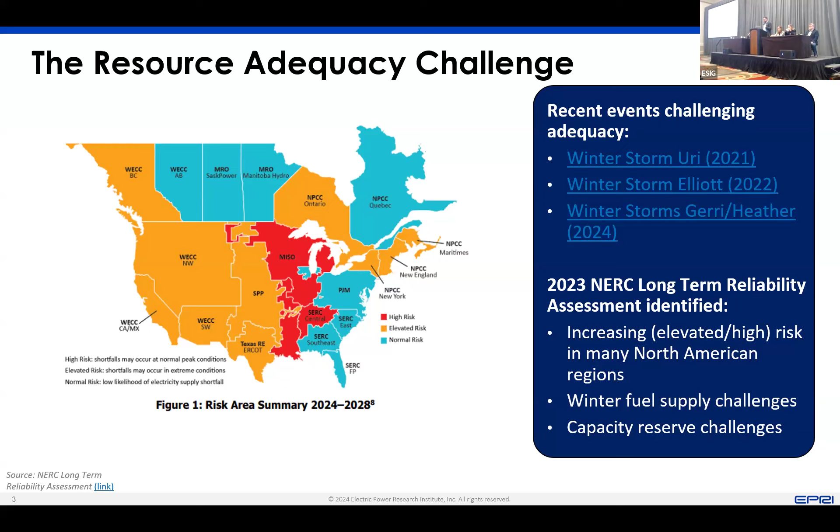Being able to understand whether we have an adequate system is going to be important for the future. So we set up this initiative back in 2021 at EPRI to look at where we need to rethink or revisit a lot of the adequacy issues.

Over the past few years, as most folks would know, there's been a lot of updates already to a lot of the processes being used at RTOs, at utilities, by regulators and others.

So a lot of these things are happening in process or in parallel with a lot of the activities we did here. This was a project we started, as I said, in 2021, finished late last year, early this year. We had about 25 different members.

Do want to acknowledge the funders there, many in this room, a mix of utilities, RTOs, NERC are there. We also had a pretty decent external advisory group.

Again, quite a few of you here were part of that, so appreciate that. And a lot of partners down on the bottom left as well.

Split it into three areas, and I'm going to focus on one or two of these today, just pick out a few particular key findings. One around the processes: how do we actually think about what resource adequacy is, what should you be measuring, what scenarios you need to measure, and what are your criteria and metrics you're measuring against.

The actual models and data that you're using to assess adequacy—how you actually model the different types of supply and demand side resources, how you look at what data to use: load, wind, solar data, the generator characteristics data, all of that piece.

And then the actual tools—there's a large amount of commercial tools out there, also open source research type tools—being able to understand what those tool capabilities are, where the gaps are, and start looking at addressing some of those.

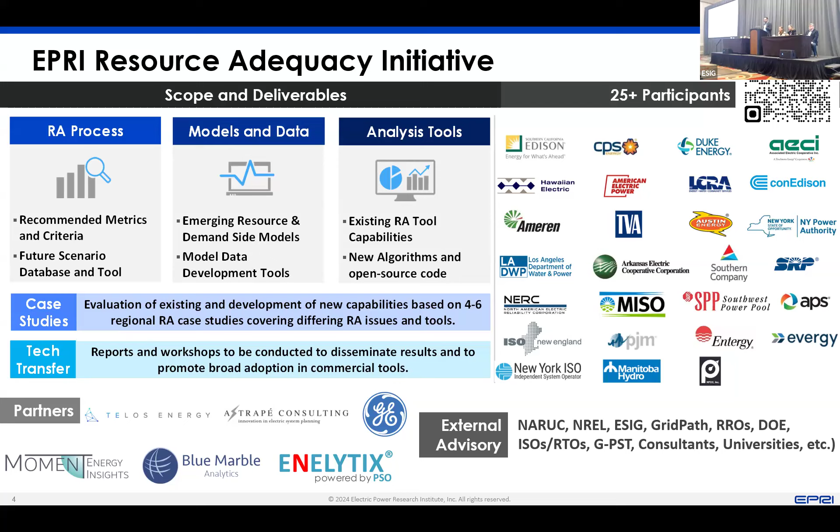We use these case studies to illustrate some of these issues. There are 6 different case studies representative of the types of regions. Typically we looked at something in the near future and then something in the next decade when there's more renewables, more electrification, those types of things. We had those to level set and understand things like which metrics make the most sense to use, which criteria you should assess, things like weather dependent outages. We did that in some of those studies, or energy storage, and quite a few of the studies that I'll talk about in a second.

The intent wasn't to actually look at this specific region and try to understand the adequacy risk in that region. There are already lots of folks who do that themselves for their own assessments. But really trying to use those case studies to understand the changes that are needed in the assessment process.

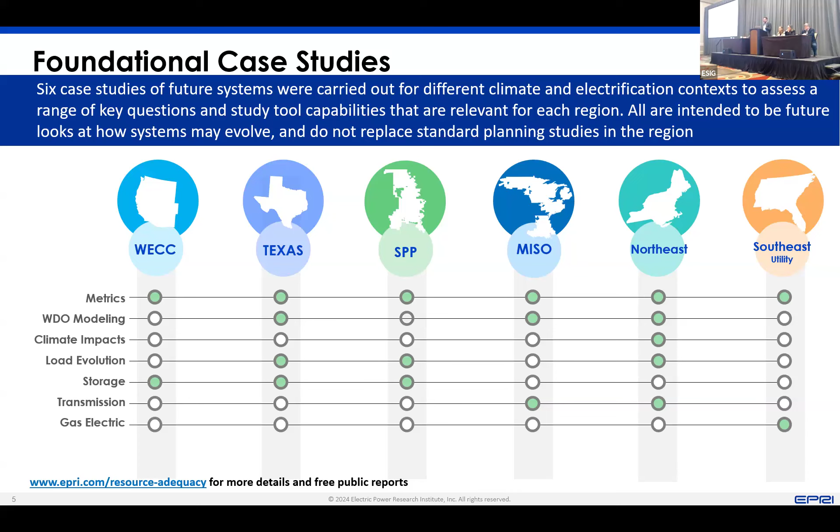Coming out of this, there's basically 7 main deliverables that we pulled together that are available. The first 3 are more at a high level, more strategic, looking at how you set up your resource adequacy philosophy, what is resource adequacy, what are the principles you need to use when designing the process, and what you might need to think about as the resource mix changes as we go to clean energy or net zero or a zero carbon kind of system.

What should we be doing when we think about resource adequacy assessment? Then the scenarios, how you actually develop scenarios and select those. Part of a side project on this, we worked with ISO New England on a screening tool to identify which periods, across large amounts of historical weather data projected for future climate, are the conditions you should be studying for resource adequacy and energy adequacy type assessments. And then the last one's on metrics and criteria.

I'll talk about that in a second at a high level, but that was the one that, when we worked with the various members of the project, really got the most attention for most of the project. We need to probably revisit the standard 1 day in 10 LOLE. I know ERCOT will talk in a while about some of their work, trying to understand what updates are needed there, both in terms of the metrics used as well as the criteria. So metrics being the actual number, LOLE, but criteria being what level of LOLE or EUE or whatever it is that you need to meet so that you've got a reliable system.

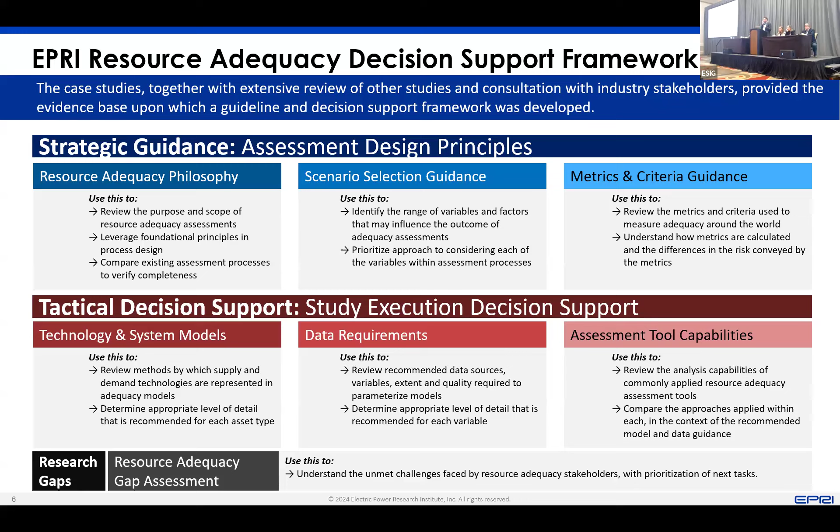So for each of these documents, there are tables that show what the key issues are, so practitioners can go and understand where they sit, what changes they may need to make in terms of the data they're using, or the models or tools they're leveraging. And then we did a gap assessment as well around future challenges, really understanding the known unknowns, and then the unknown unknowns too, the things we don't have as good a handle on.

Just to talk a bit about some of these, I'll go quick, very high level, on the metrics, because I know there's going to be more discussion on some of the metrics issues later. We came out with 4 metrics recommendations and 4 criteria considerations. I think maybe a little less strong on the criteria just because it is quite specific to the system.

In terms of metrics, we don't have one metric, and I think that's pretty well understood at this point. There's a good ESIG report that Telos led a few years ago that goes through a lot of this, looking at not just the average values when you assess across a Monte Carlo simulation of hundreds or thousands of draws, but actually looking at what's happening at the outliers, the tail events or top percentile events, to better understand when things go wrong, how badly can they go wrong.

Better leveraging existing metrics means looking at things seasonally. There's been a lot of focus now in places like MISO and SPP on seasonal assessment, being able to understand when and how those metrics are showing adequacy shortfalls, so you can better understand what you might do to mitigate it, and actually describe the characteristics so you can understand what kind of customer impacts you might have and what that means from a system perspective.

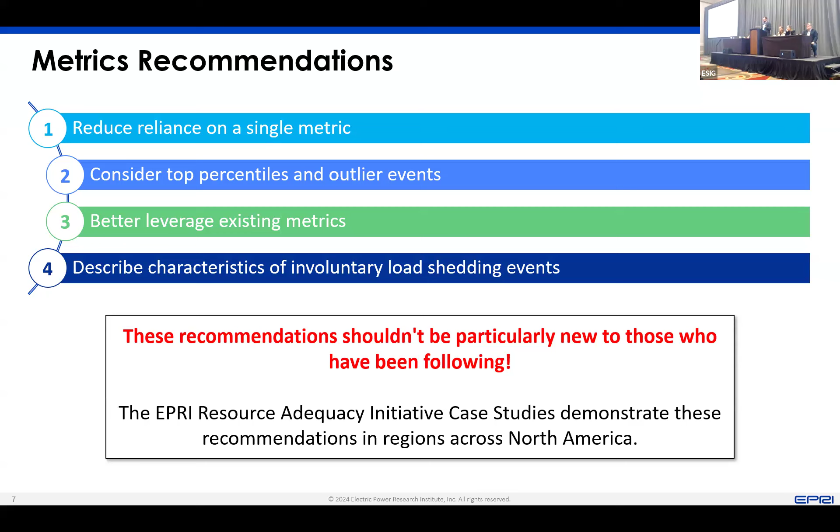From a criteria standpoint, there are a bit more considerations. I don't know that they're hard recommendations, but it probably isn't a binary choice anymore - it's probably not okay, we've met the requirement and we're fine, and if we didn't meet it, we're in trouble. There's probably something a little bit more nuanced than that you need to think about. Multiple metrics is one of the things there.

The criteria setting should consider economics to some degree, whether that's directly in the actual assessment or at least thinking through what's going to happen if there are shortfalls and what are the ways you're going to actually meet that if you do need to build more resources.

Customer expectations, as we think about the nature of risk - if we're moving to winter risk type events, the appetite or the ability to actually absorb load shedding might be a lot different. The damage due to load shedding can be very different there as well. So thinking through that and understanding the criteria in that context.

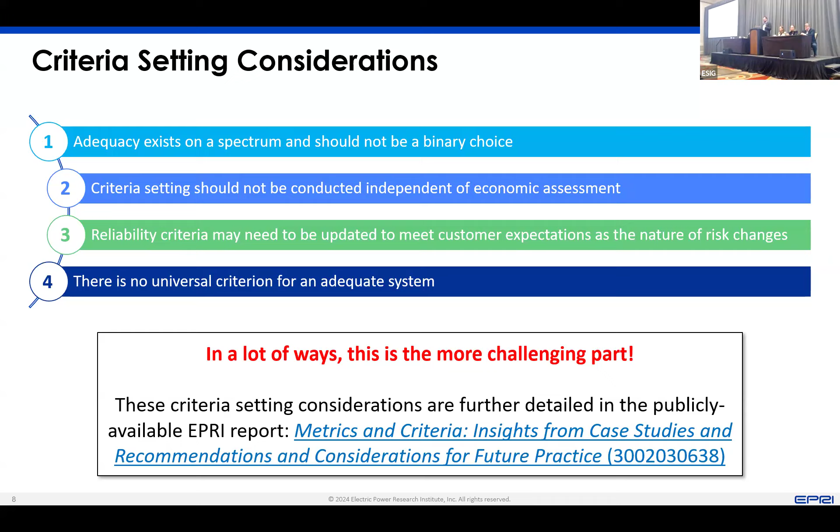We also think there's probably no universal criteria. I know in North America, we've always had kind of the 1-in-10. It may not be the case that we go to an EUE metric and we all have a normalized EUE of 1. It could be we need to think through other ways to do that.

So that was the metrics piece, and I know there's more discussion later. I just wanted to touch on one or two other things that we saw.

Storage is one of the things that really comes up a lot in this - one of the key factors we saw has a big impact on the results. Whenever we do any of these assessments, how you model storage is always a key piece. There are lots of different assumptions you can make with energy storage modeling in adequacy assessment - not to say there's one perfect way to do it, because there are different considerations depending on what the study is trying to do.

Things like how you actually dispatch storage - is there an economic dispatch? Is it based on reliability or some heuristics? Is it just using it to peak shave, almost as a time series you could put into a model? And then how you actually optimize it - what's your optimization window, do you have look-ahead, do you have the ability to store energy now for using later, and how you're thinking about state of charge management there.

How you model efficiencies is quite important and can have a big impact on results. The state of charge itself - do you continuously monitor it or only monitor it during risk periods? And then things like actually modeling outages of energy storage as well.

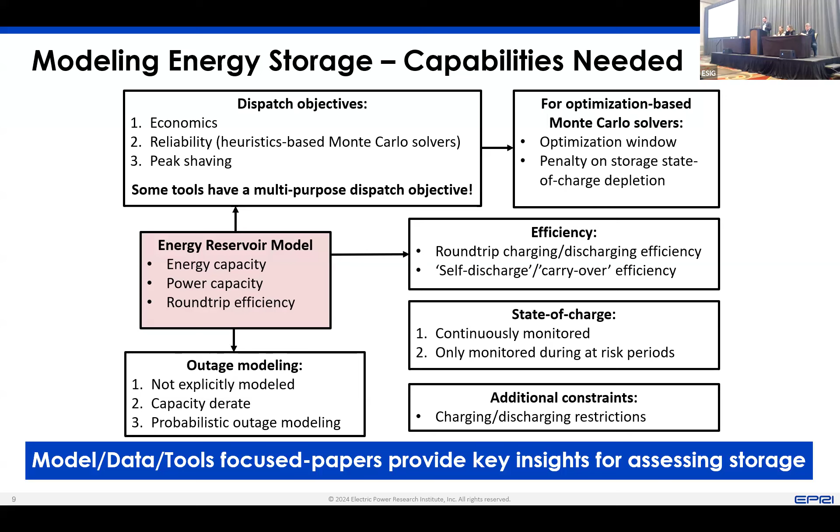A few interesting results we saw from some of the studies - this was the study in Texas that the Telos folks led, where we looked at different ways to model energy storage in Plexos, with different approaches as you can see. One thing you can notice is the expected unserved energy, as you'd expect, is the same no matter how you optimize energy storage - you're just moving your energy around, so it's going to still have the same unserved energy.

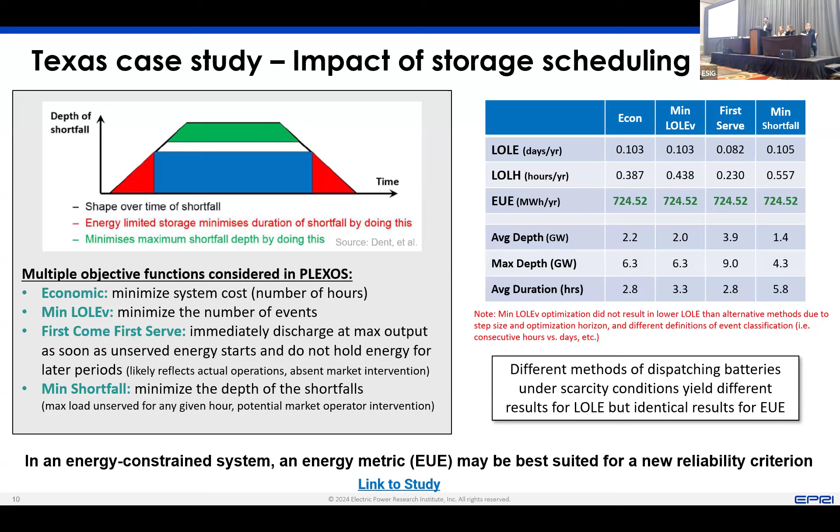But some of the other metrics can be quite different. So if you're going to use this to set capacity accreditation or understand capacity expansion, you have to be clear on what particular metric to use. You can see quite a variety in things like LOLH or LOLE, as well as the size and implications of the shortfall. So this is definitely one where an energy metric like EUE seems to make a lot of sense.

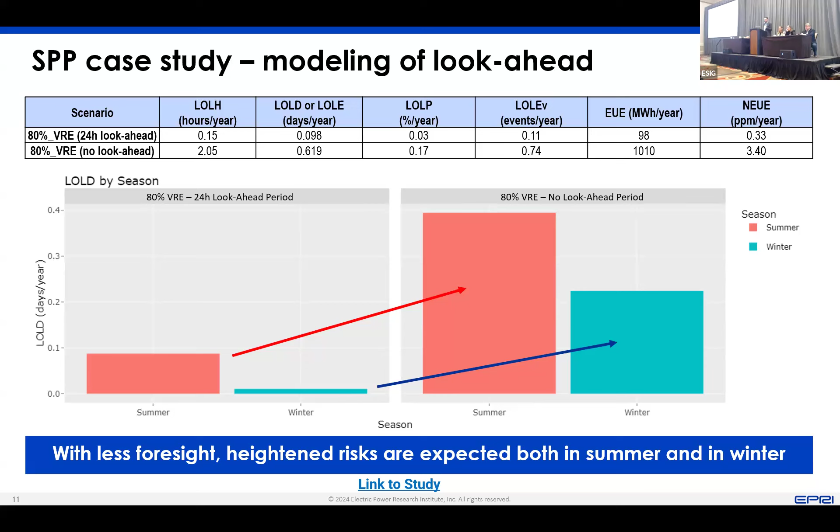Another piece on the modeling, I mentioned things like look ahead. This is a bookend kind of case - we didn't have any look ahead in the SPP case study we ran. Looking at it, if you don't have any look ahead, you get a lot more load shedding. That's obviously unrealistic. Most modelers know you have to have some look ahead for storage, but the default often isn't that. Being able to understand that when looking at results in capacity adequacy assessment is important.

And then the last one I mentioned, using the GridPath tool that Elaine - I think Elaine's in here somewhere - ran for us. We're looking at long duration storage in the West. That was probably the most forward-looking case study, looking at very high penetrations of, and in some cases nothing other than, wind, solar, storage, plus the existing nuclear and hydro across the entire West. Lots of interesting things there when you have to use long duration storage to make your system adequate.

So some of the modeling choices, even things like when you actually start the simulation - is it a June 1st start or a January 1st start - can have an impact on how much storage you might want to build. Looking at things like the penalties you put on state of charge depletion, or those optimization windows. There's a lot of trade-offs there around an optimization window that's shorter, which is likely to be more realistic in terms of forecast accuracy.

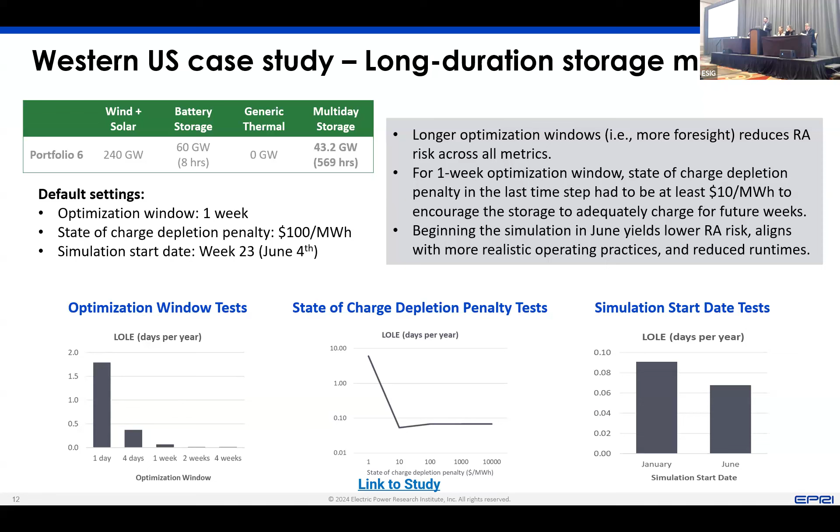If you start going out to a longer optimization period, then you're probably making assumptions about your forecasts that are more optimistic than they really are. But at the same time, the amount of energy storage you need might be smaller if you're looking at a longer optimization window. So a lot of interesting things we were seeing there. You can go and download that study and look at it.

One other thing I wanted to bring up, going back to the Telos study with Texas, given how data centers are talked about so much these days - this wasn't necessarily data centers, but a kind of large, flexible load that's been added there. If you look across, we had a base case where you brought that to 0.1 day per year. And if the flexible load was 100% flexible, responding during high periods all of the time, you obviously don't have a reliability issue with that. It's not going to make a big difference.

But even if you say only 10% of that additional load - I think it was 8 gigawatts of additional load in Texas - if only 10% of that wasn't flexible, if it stayed on or didn't always come off during load shedding periods or high risk periods, you can have a pretty significant reliability implication. So it makes sense, it's obvious, but flexible load is going to be important.

And then we looked at things like, if that load can also offset with renewables or follow renewables or defer retirements of thermal plant, you also have some benefits to the system from that. So we looked a bit at that, and we're continuing to look at this data center issue with some follow-on work we're doing around data center flexibility.

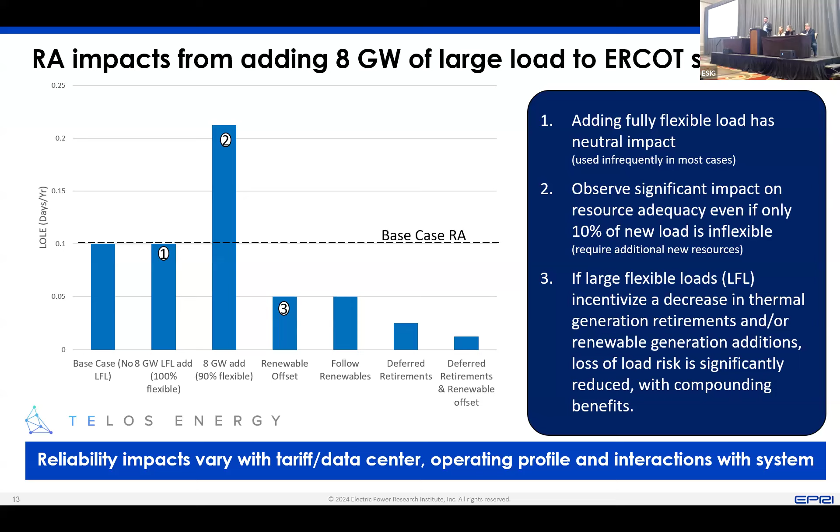So just to finish off, last two slides here, talking about some of the key issues. There's a few of these that we have a pretty good handle on at this point, I think, as an industry over the last few years - around additional metrics or criteria, whether that's the ERCOT one that Pete's going to talk about, or whether it's things like NWPCC that you can see here in the figure.

Using different metrics is kind of becoming more common now and more thought of. I think when we started this effort a few years ago, people were a little bit slower to say we should be using different metrics, but now it's starting to become a more obvious thing to do. Looking at things like the range of operational conditions and resource behavior has to be part of it as well.

I know weather dependence modeling has become quite important, and some RTOs are starting to bring that into their actual adequacy assessments or their capacity contribution calculations. So things like flexibility requirements, weather-dependent outage modeling - you can see some of the outages based on temperature are not the same as just using an average outage across the year.

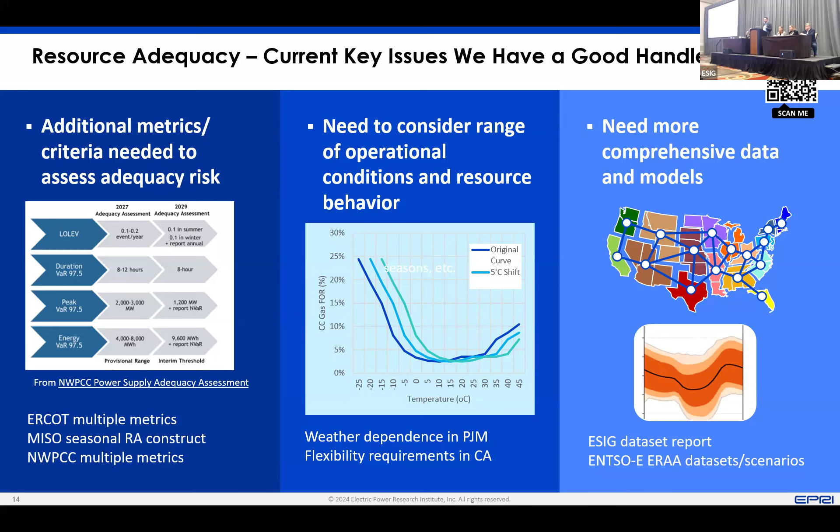And then the data and models - there's the ESIG report that came out earlier this year on that, and a lot of work around putting in places like Europe to develop those common data sets and common scenarios that are being used to make sure everything's studying on the same page and using the same type of data.

There's a few things though that I think still need a fair bit more work. Extreme events is definitely one of those. We did some work with ISO New England on risk screening and understanding when you might have more challenging periods, whether it's hot weather, cold weather, those types of things.

There's extreme events starting to be considered in some of the studies being done across the country now, but that's still something that is probably less well understood in terms of how do we develop the data sets that are needed. A lot of the climate models are not hourly models that can be used for temperature, load, wind and solar, but being able to bring some of those in and understand them is important.

Demand flexibility has a lot of potential value. That figure, which is hard to see, was some study work we've been doing using the SERVM tool, looking at a utility, trying to understand if some portion of their demand is flexible, how does that benefit resource adequacy? So you have to develop methods to better understand demand flexibility - it's not the same as a flexible generator. So how do you bring that into a resource adequacy study?

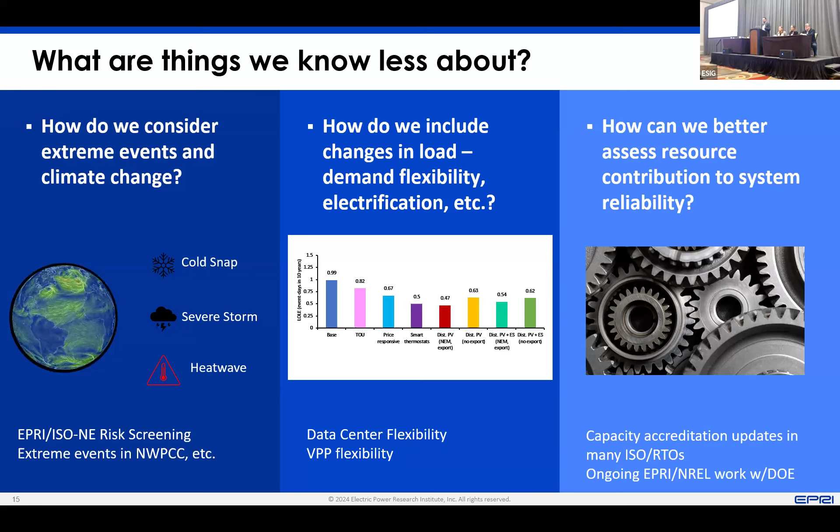And then also the capacity accreditation, I think, continues to be something that's worked upon. There's a lot of debate and discussion we could have on that, but won't really get into that right now.

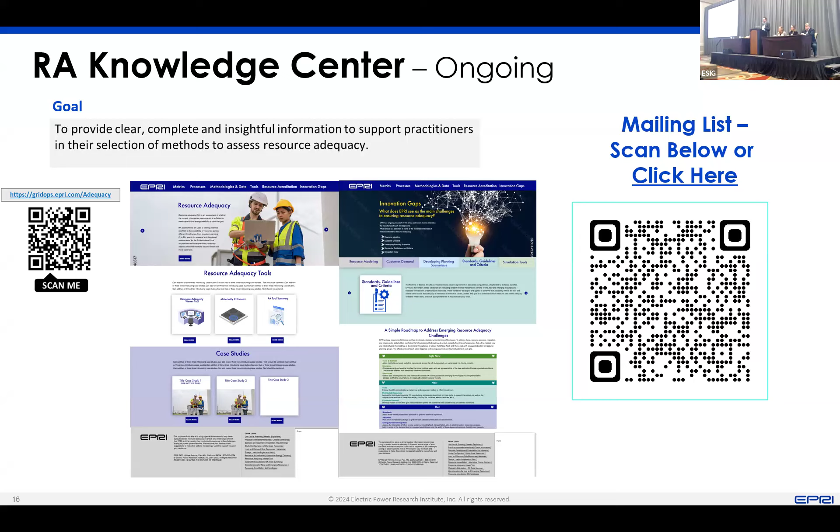Great, thanks, Aidan. So from the EPRI Resource Adequacy Initiative, that website that you had on your last slide, you can access all of the reports? There's a lot of reports that EPRI put out. So if you're new to resource adequacy, or even if you're not, it's a great place to go to get reports on all of these different aspects that Aidan was discussing. Yeah, how many reports are there, just to clarify? I think 15 or 17, something like that.

Yeah, it's a lot. And then also don't forget to check out the ESIG report from the task force on the metrics that you mentioned as well. Great, thanks, Aidan. Well, we'll move to our next speaker.

Hannele Holttinen, who I mentioned earlier, is the operating agent for the Task 25 group within the IEA Wind TCP. Hannele is going to give more of an international perspective, or I guess there's going to be an example from Europe, but it's really summarizing recommended practices that came out of this international group for how, among other things, resource adequacy can fit into a broader grids integration study workflow.

Thank you, Bethany, for the introduction, and good morning, everyone. So I'm actually having in my slides all of our recommended practices, how to make integration studies with wind and solar, or system impact studies or integrated planning. This would fit all of them. So I've just put into parentheses some of these that I will not have time to speak on.

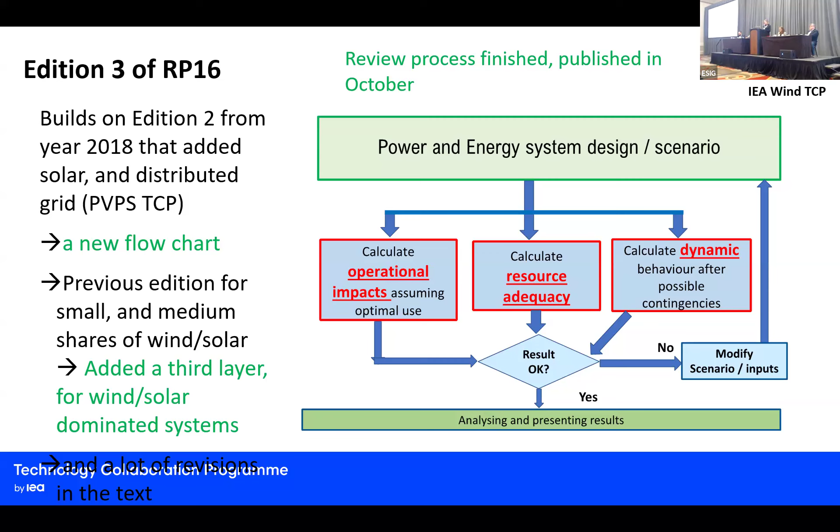So what is different for edition 3 of this report? One thing we noticed, which we had only briefly touched upon in the previous edition about 5-6 years ago, was that there wasn't much yet of this energy system coupling. This is becoming more and more important for future power systems. Future load scenarios demand flexibility from new types of loads: power to X, power to heat, storage components. All these provide potentially a lot of flexibility, which is crucial for these studies. It's very important to take into account.

Here is also an example from Energinet, which I think is currently being presented in the other room, of potentially half of the future load being flexible.

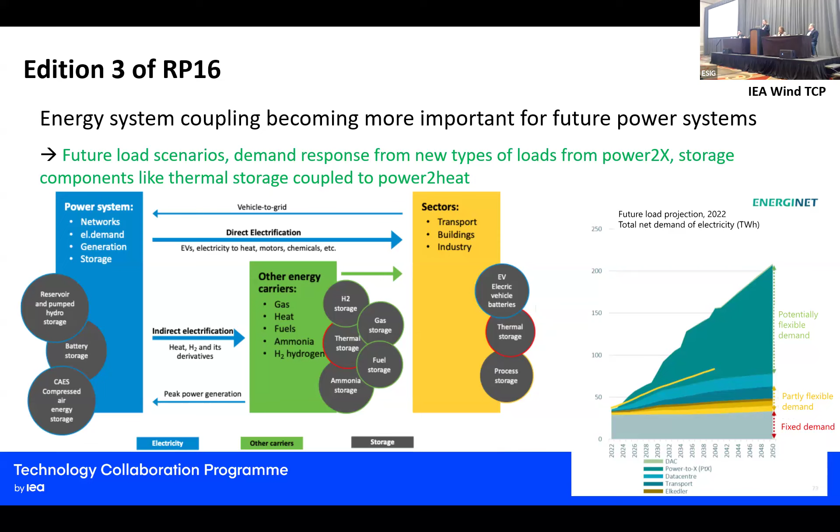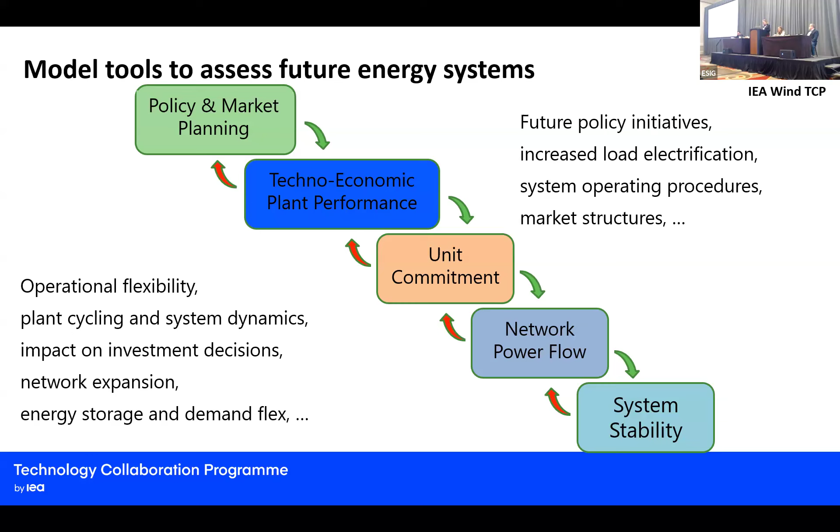The model tools to assess future energy systems, just as we saw in a previous session for integrated planning, start with policy planning, going more into techno-economic plant performance, unit commitment, power flow, all down to system stability. Very rarely do you see a feedback loop going all the way back up to your policy planning. But this is, of course, what we are moving towards, with different types of feedback loops.

Okay, now going for the actual recommendations. First, we have a big table about input data.

For the resource adequacy part, it's important to have long time series; 30+ years is recommended. Forecasts are not needed, but for the load you need the same things. For the network, the cross-border capacity, and also when you take into account your neighbors, and the forced outage rate as what is really needed for the other power plants.

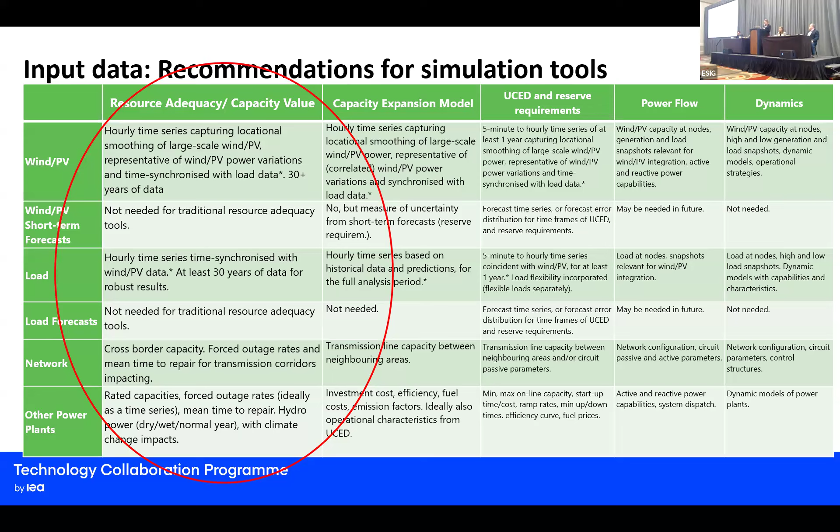What we add as a note is that climate change impact will become more and more important. We know the data is not yet of very good quality, but this is something you need to assess in future studies when you look further ahead. Also, the technology impact, increased capacity factors that we have for wind and solar technology, is important to take into account.

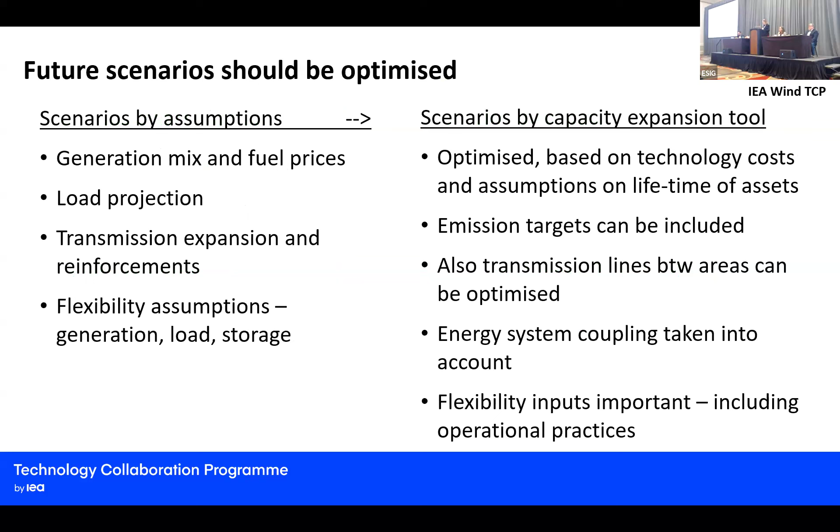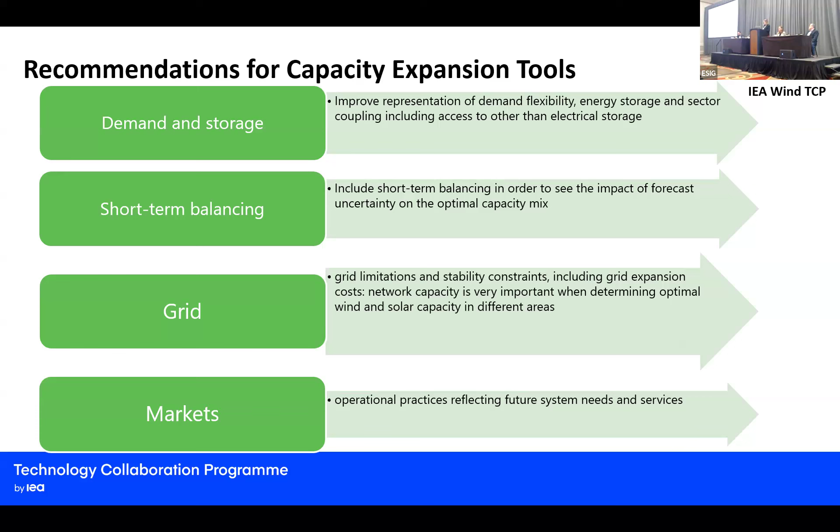Something about the scenarios that I won't go into here, just mainly saying that if you look at anything else than very short-term studies, you need to use capacity expansion tools. For these capacity expansion tools, there are things that need to be improved in the model tools, to take into account demand flexibility, storage, grid limitations, and also future options for market operations.

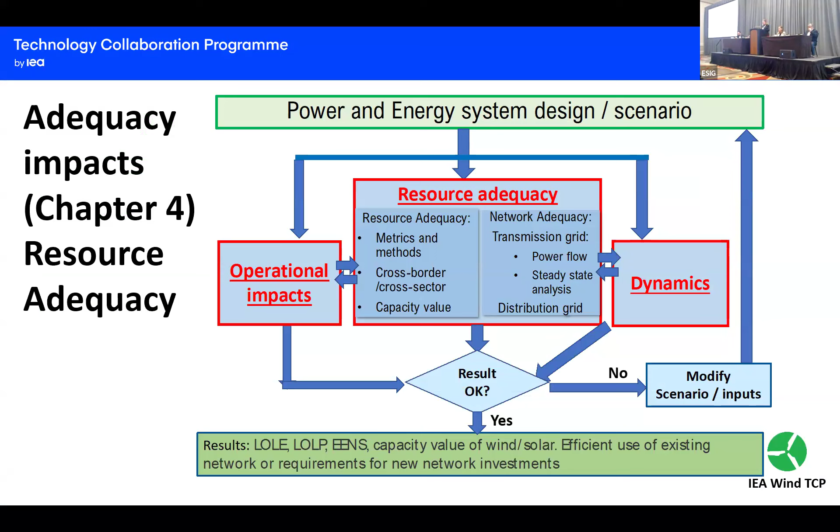Coming to the checks about resource adequacy, we have formulated it so that first we talk generally about resource adequacy, and then also about the adequacy of the network, the transmission and distribution grid. The main recommendations are very much similar to what we just saw from the EPRI slides.

So basically, what we want to highlight is the neighboring areas. The import possibilities are very important to take into account when we have larger systems. Any single state or country is not an island, and you should take this into account when you look at resource adequacy.

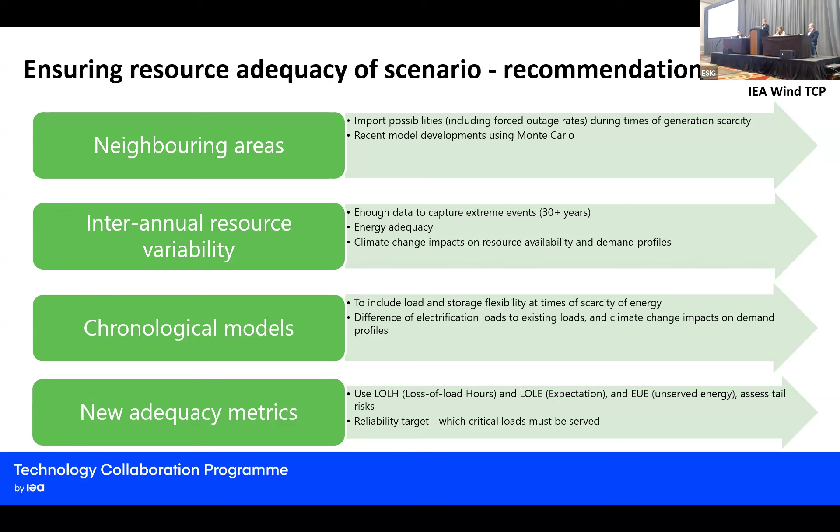Of course, you need more data to look at the interannual resource variability, so it's also about energy adequacy and weather dependence. And then to be able to include load and storage, you need chronological models. Aidan talked a lot about these metrics, so this is also something important.

I have included here a couple of slides of Europe. These were actually presented in the last ESIG meeting. There is a whole slide set of how this is done in Europe, but I'm just trying to remind you of this very excellent work that ENTSO-E is doing in Europe, constantly developing the methodology on how to do this in a very meshed, interconnected grid in Europe.

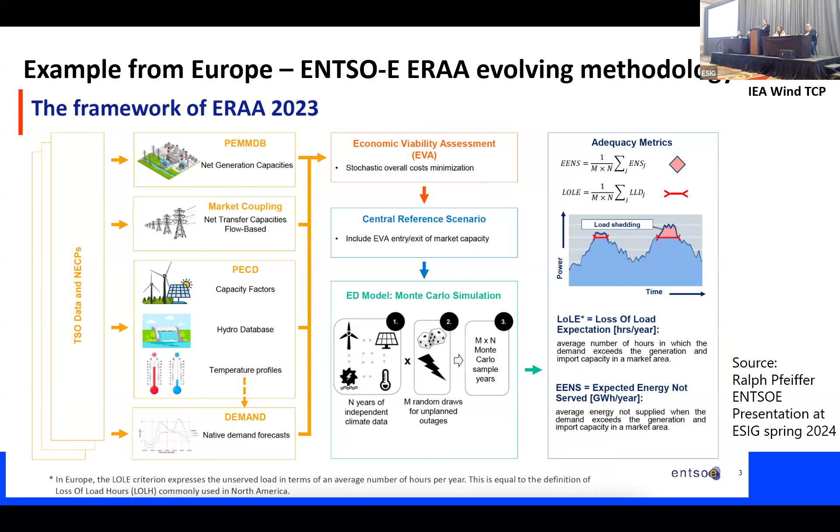Basically, they have the data coming from each of the national states, and then they do an economic viability assessment to make sure they have an idea of how much of these generators will still be operating in future. And then they do the main resource adequacy runs with Monte Carlo simulations, and then they come up with these metrics.

Here is a more zoomed in picture of the simulations. They have many climate years with time series that are time synchronized with wind, solar, anything weather dependent, the hydro, combined heat and power, and the demand. For the outages, they use Monte Carlo, and then they have these Monte Carlo years.

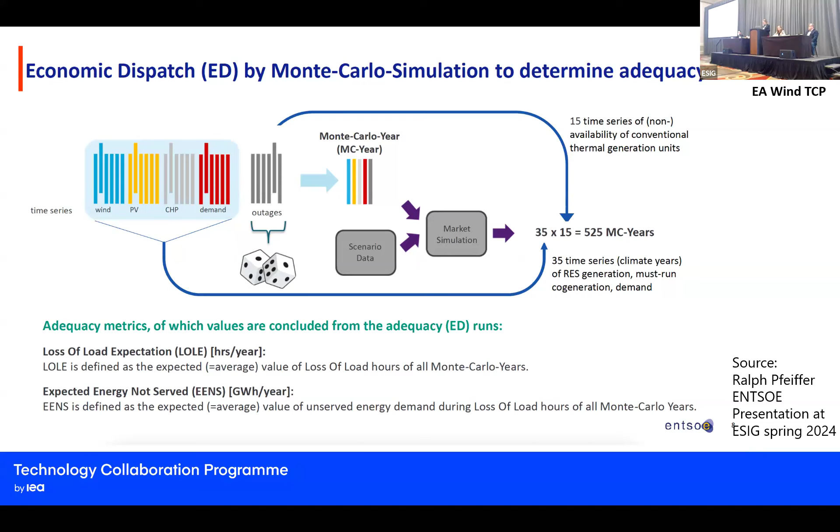So they come up with 525 Monte Carlo years at the end. And this is an example of how they present their results.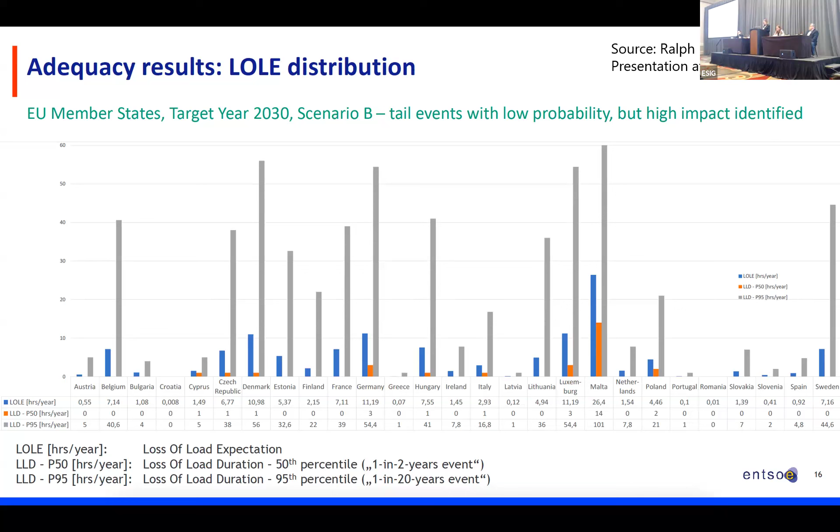It's in gray, showing much higher loss of load probabilities for most of the countries, capturing these. And then in orange, you see a sort of 1 in 2 years event. So this is also something that is evolving and being captured more as this methodology evolves.

So current considerations - it looks like every time they make this study for the whole of Europe, they add something new. And now they are so far doing it for a couple of years towards 2030, and now they are thinking, okay, should they do it for every year towards 2030?

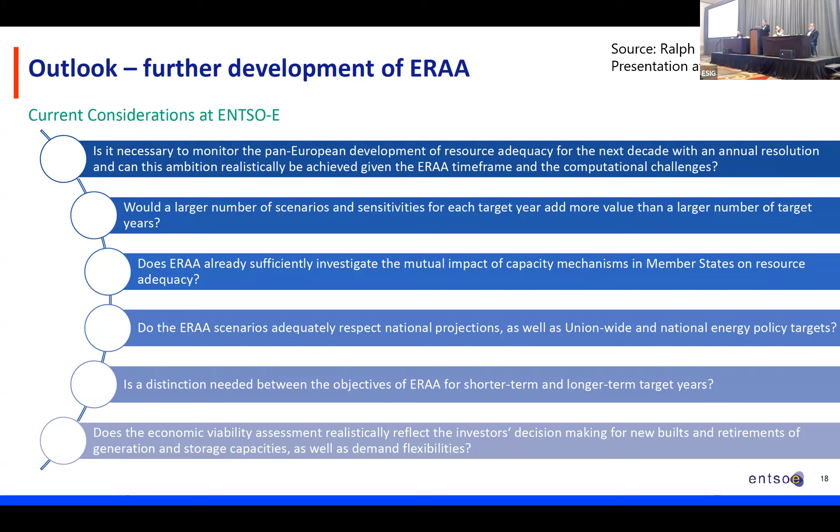Would they have more scenarios and sensitivities? What about when the member states are currently discussing different capacity mechanisms to incentivize capacity and ensure resource adequacy? How can they take that into account? And how generally are the national projections and the European policy reflected in a good way?

So that was about resource adequacy, but very much related to resource adequacy is the capacity value of wind and solar, which is heavily system dependent. So you need to update it whenever there are changes.

And we still recommend this ELCC method, which has been recommended for a long time, starting from IEEE and also in our first edition. But then we were looking at the sort of doing these COPT tables for the generator outages, and this is something that you can't do anymore in future if you want to include storage and flexibility of demand. So you have to go towards Monte Carlo methods.

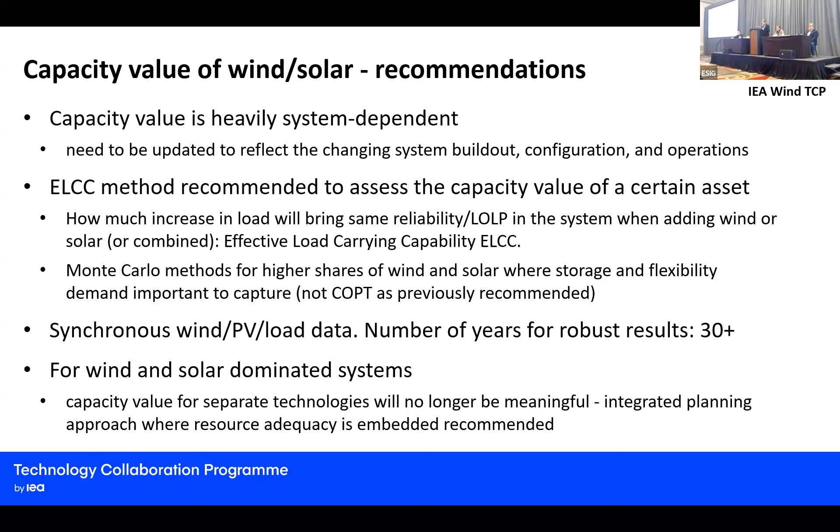And here it's important that the wind, solar, and load data is time synchronous, and you look at a lot of years. Finally, when you start having 100% renewable systems, then perhaps capacity value is no longer a meaningful metric at all.

We also have some recommendations for the transmission adequacy. Of course, the transmission planning process is something that the system operators do, but we try to highlight some of the things that you really need to do when you have wind and solar.

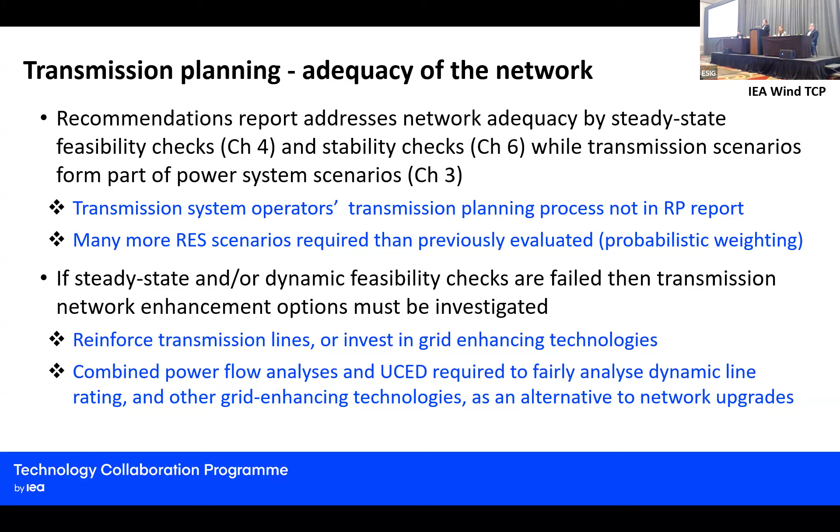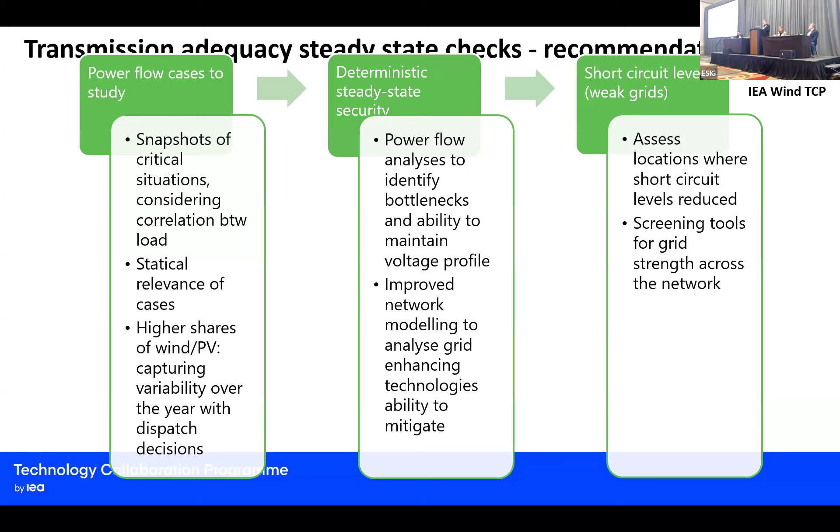So these are like steady state checks that you can do, and then of course you need to look at network enhancement options if any of these checks are not working. Here you would need to make power flow cases to look at the deterministic steady state security, and also the short circuit level, so for weak grids.

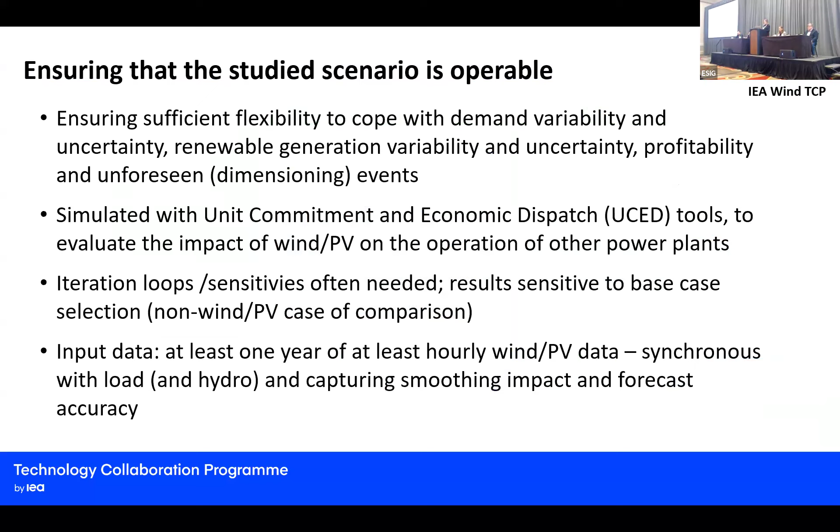And I will just show you what you need to do for operational impacts, to ensure that the scenario is operable and there is enough flexibility. This is usually done by the unit commitment and economic dispatch. Here, how you do the time series, how you select the scenario, especially if you want to compare the impacts of wind and solar, you need a base case.

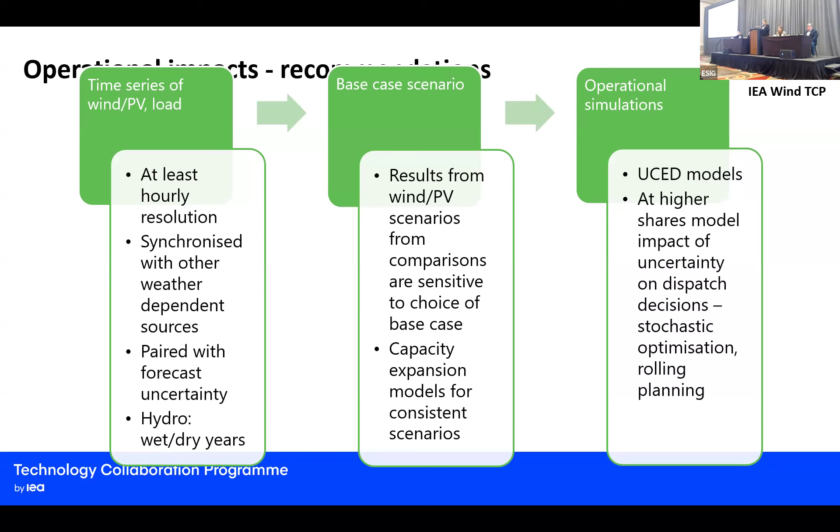That's very important because it will totally impact your results. And then finally, the operational simulations, where you need to model the flexibility, the grid constraints, the reserves. And then finally, we come also to a chapter of dynamics.

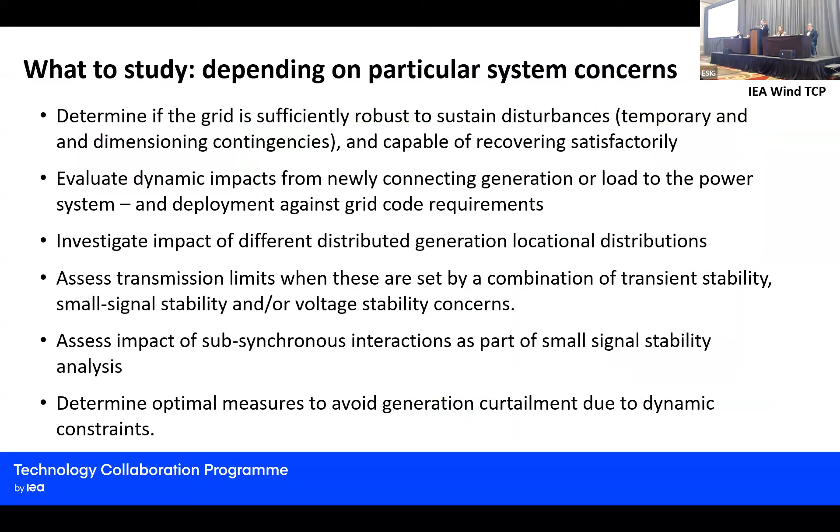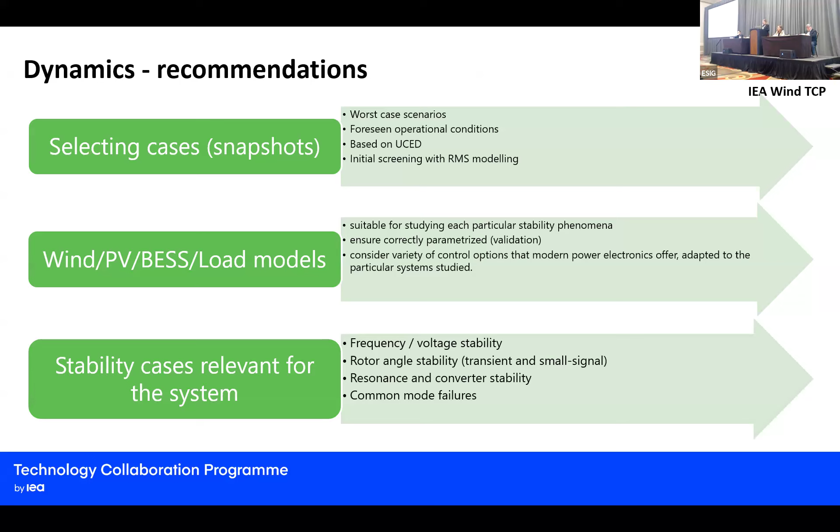These checks will depend on the particular system. We also have recommendations generally about selecting cases, potentially screening studies, how to model wind and loads, and then finally the stability cases, and how the tools are evolving. And then we have recommendations for all of these different stability cases, which I will not go further into here.

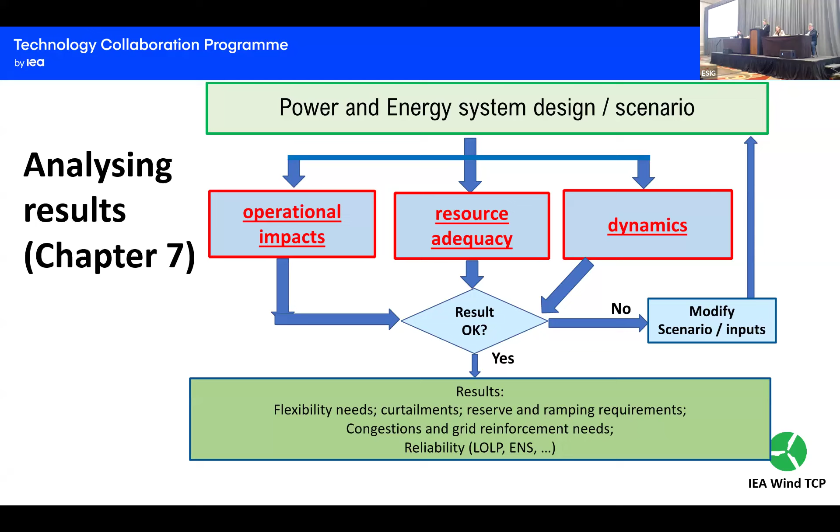So finally, then you would come to analyzing the results, which could be like flexibility needs, curtailments, reserve needs, grid reinforcement needs, or reliability with different metrics.

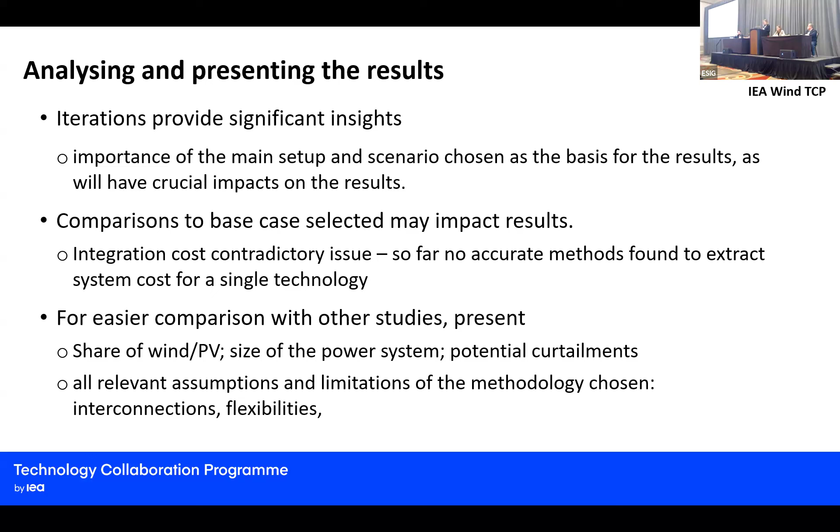Generally, we want to say that these iterations in the flowchart provide significant insights. So you would probably need to go back in your main setup and scenario, especially if you're comparing the impact of wind and solar — then the base case selected is very important, and this can have a large impact. For easier comparison, we recommend that you present the share of wind, perhaps curtailments, and all relevant assumptions and limitations for the methodology you're choosing. Actually, these checklists you can also use for benchmarking any of the studies that you make.

Okay, so finally, to summarize: we have this whole setup of studying any power and energy system design or scenario with these checks of operational impacts, resource adequacy, and dynamics. And it's clear that most studies would analyze only part of these, and goals and approaches differ.

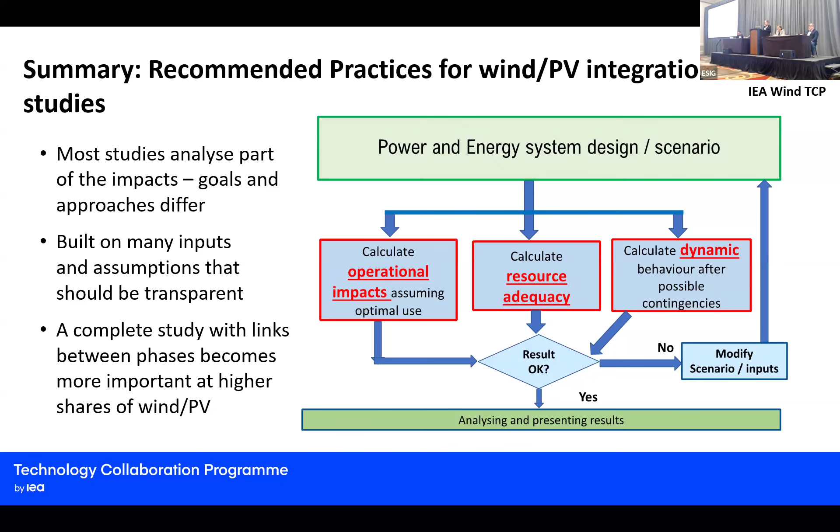All of these studies are built on so many inputs and assumptions that it's very important these are transparently described in your results. And then finally, you can also use these benchmarks that we've made. For future work, there is a lot of evolution in methodologies and tools to include larger areas, complexity, demand and storage, and also integrated models for integrated planning, and finally the cost versus risk reliability interface.

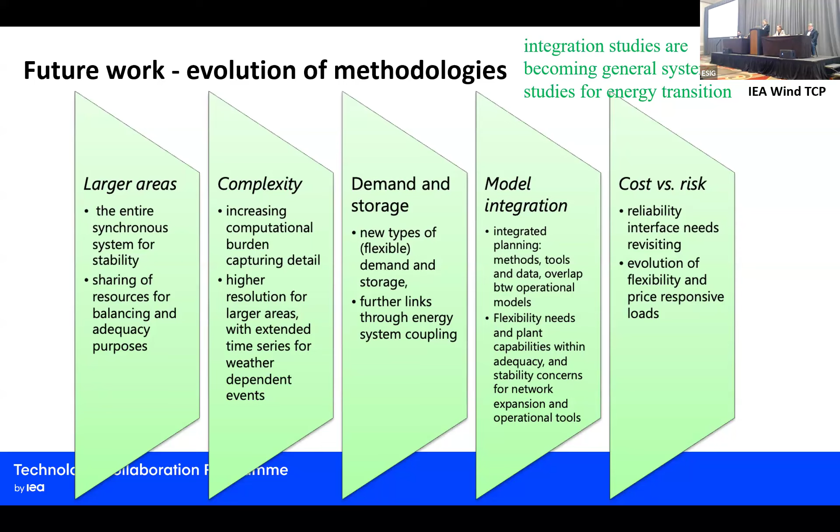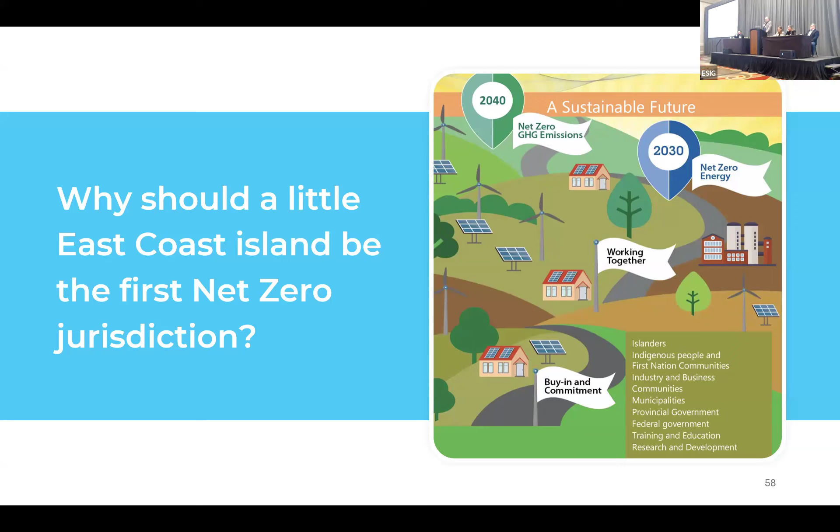Why are we going to net zero? Derek could have spoken in much greater detail than me, but we've got all levels of government engaged - First Nation, industry, businesses. Our industry base in PEI is farming, fishing, tourism - sectors where you're exporting product and attracting people to your province. There's also good business in moving towards net zero and more green.

I can't speak to much detail on this, but we've made some progress on the move towards net zero and reducing our greenhouse gas emissions. We are on a pathway. Current policies are not quite yet enough to get us there, but new policies are being developed which hopefully will see this through.

The main reason people in PEI are for the most part behind this - it's been interesting to listen to people in other jurisdictions who are also seeing extremes and impacts of climate change, yet still have that consumer mentality. Watching each of these sessions, the ultimate cost of this still has to be tested in terms of what our ratepayers are willing to see.

On the coastal hazard side, we are an island - basically a sandbar in the middle of the Atlantic Ocean. Coastal erosion is a major issue and a major concern. It's impacting our infrastructure - roadways, bridges, harbors and ports. It's impacting people's property and homes. So that gets a lot of people's attention.

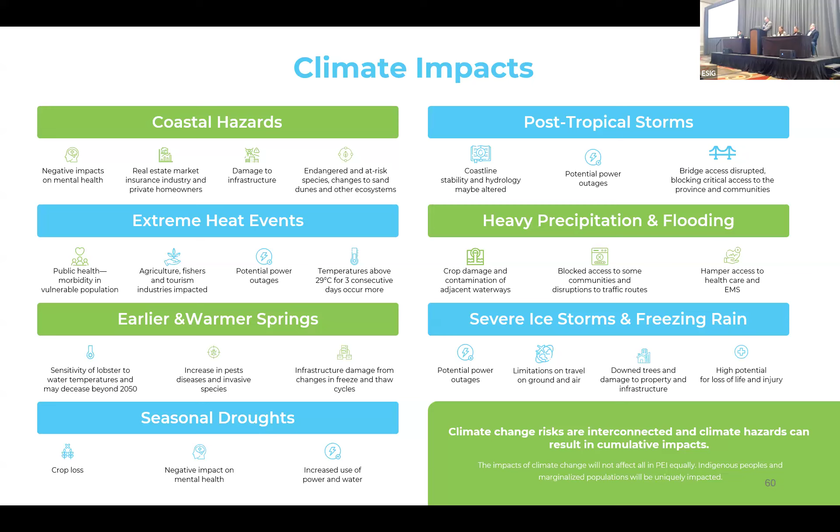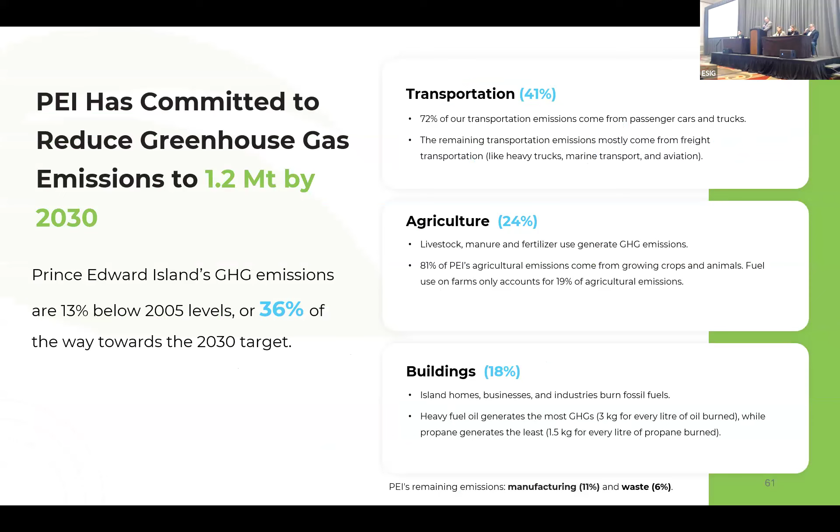Just the various areas we're dealing with, transportation, agriculture, and buildings is where they're putting their focus predominantly, seeing some improvements in each. Some of these are going to be harder than others. Agriculture, for instance, is known to be a challenge.

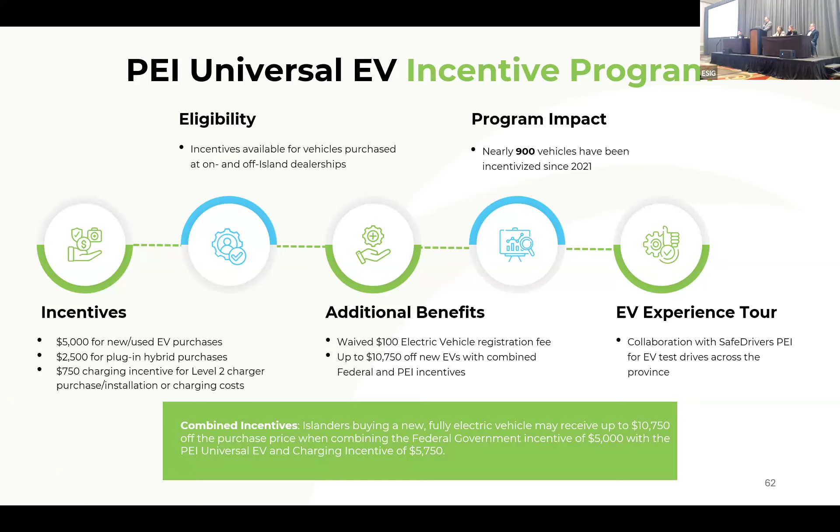We are looking at EVs. There is an EV incentive program. We do like our vehicles. It's more easily done in an urban setting than rural, but there have been investments made both in some incentives for the EVs as well as chargers, etc. And again, to get the public on side, we've had a fairly successful transition towards electric school buses.

One area we're now hoping to see improvement is collaboration with the utility to build that into the grid for bilateral movement of energy.

So on this transition, there was different talk, and I've been in side conversations about the social science side of this and what gets people to move. When the province looked at transitioning people off of furnace oil and onto heat pumps, making them free worked, go figure. The threshold has continued to change, but basically you saw fairly heavy incentives made depending on household income.

So there's a personal example. We installed some heat pumps in our house. I think we got about 25-30% grant. My mom, who's a widow, senior, retired, they put hers in for nothing. So the transition over the last number of years, and we're about 90,000 customers, just so that number starts to make sense.

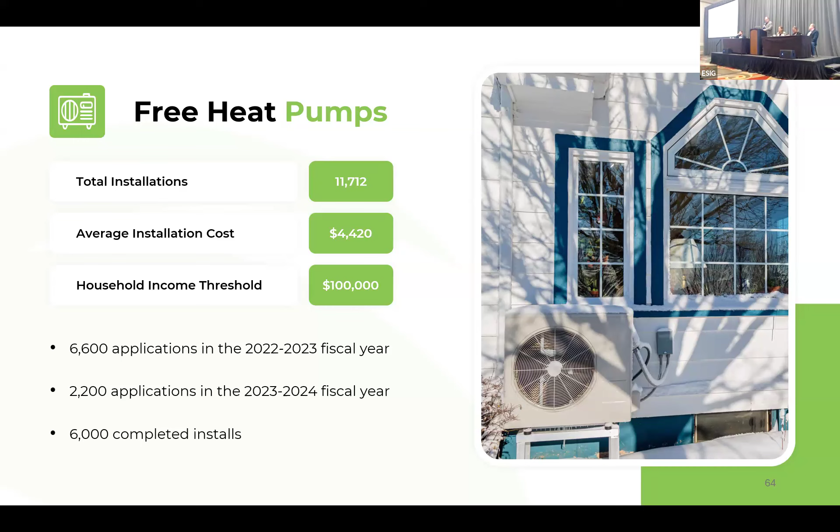So electricity in PEI, I've been at WEICan since 2007. And when I started, the peak demand in the province was around 190 megawatts, and it was a December peak. I grew up through the days where the Christmas lights were actually what drove the peak, and we were doing all kinds of programs to get LED lights and get people to not turn their lights on so long. The good old days.

We do have submarine cables through to New Brunswick, which is our connection to the mainland. There is 560 megawatts capacity, although there are market caps of about 300 megawatts. I used to say frequently, I now think it's all time.

We do have 100 megawatts of fossil in the province. There's Maritime Electric, which is a Fortis-owned utility, is our prime utility. City of Summerside, I'll touch on later, is a municipal utility. So between them, there's a little over 100 megawatts. We have an equity stake in a nuclear generating station in New Brunswick called Point Lepreau. It's small, we're just shy of 30 megawatts in a 600 and some megawatt station.

We have 8 operating wind farms, 204 megawatts of capacity. Solar has come quite a bit, we're up to 85 megawatts, 30 megawatts of which is commercial, 50 megawatts is residential. Carrying capacity there is obviously an issue on this topic.

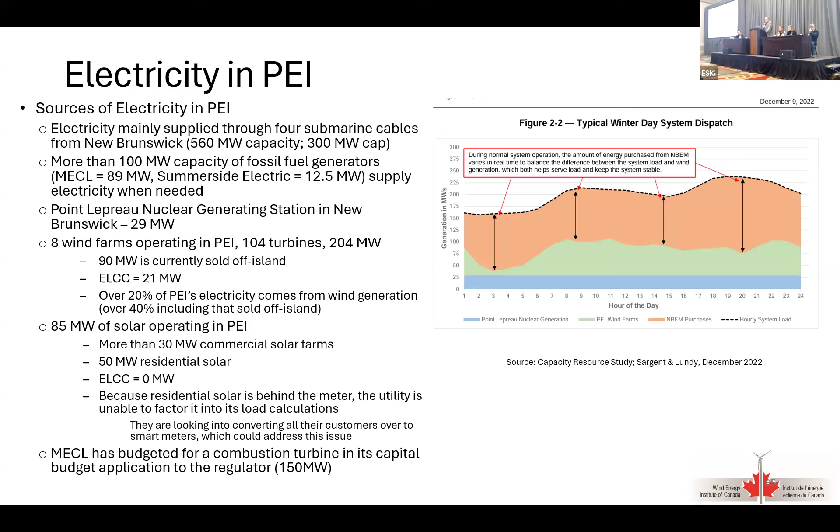What we are seeing, and this was some of the areas we started working with Nick a couple of years ago, our utility is concerned, rightfully, with some of the growth that we've seen. And there is an application into the regulator to install more combustion turbines, probably 3 at 50 each.

So annual loads in the province have increased, as I noted back to when I began, less than 200 megawatts, and the presentation that was given in Salt Lake City can give you all kinds of more information.

We had this polar vortex event, a perfect storm of an event in February 2023, 3 days of minus 40-degree temperatures. Had a bit of a windstorm in there, knocked some power out, knocked the wind turbines off grid for the most part. We taxed our system pretty much to the tipping point. It did hold, thankfully, but we saw a system peak of 393 megawatts, and leading into that, the utility was expecting we might see 360. So just what people were doing through that event was a bit of a challenge to all.

We did settle down last year, but I think everyone would agree these extreme events, unfortunately, are becoming more common.

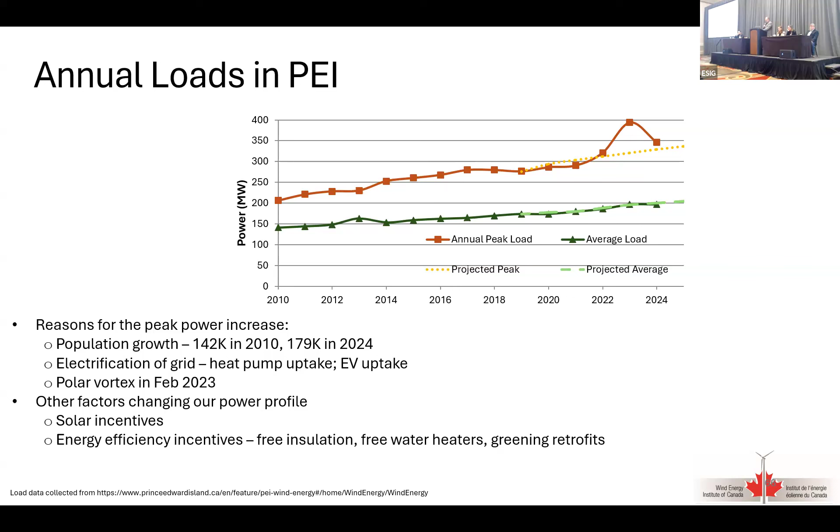I noted the heat pump rebates. So we've got 65,000 households in PEI. 12,000 got free heat pumps, additional rebates, and another 23,000. Solar installs range from 9 to 12. We have a net metering program where basically if you generate more than you consume, you get nothing for it. So they try to size these systems accordingly.

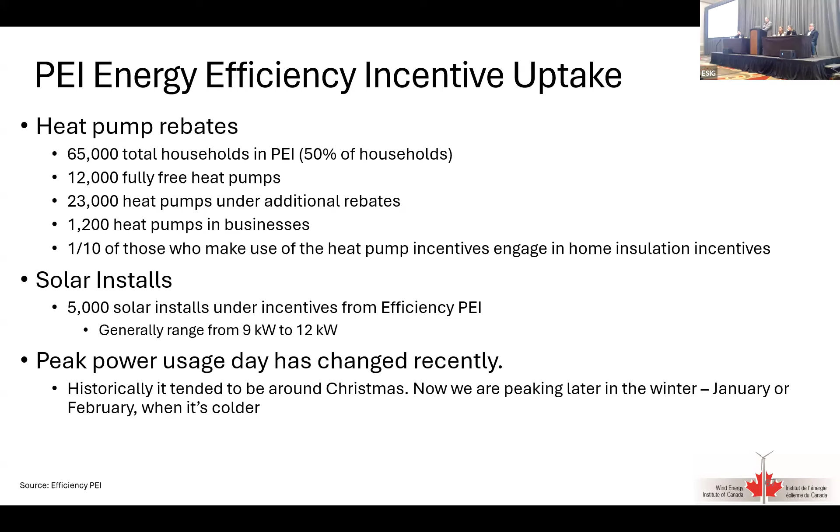So when we get into these more extreme events and deep cold, the efficiency of these heat pumps is not as good. And we do, in my opinion, need to undertake a bit of public education. People are running their heat pumps, they're not getting sufficient heat, so they're plugging in heaters and doing other things, which is just exacerbating the problem. So there's some things we have to do better on that as well.

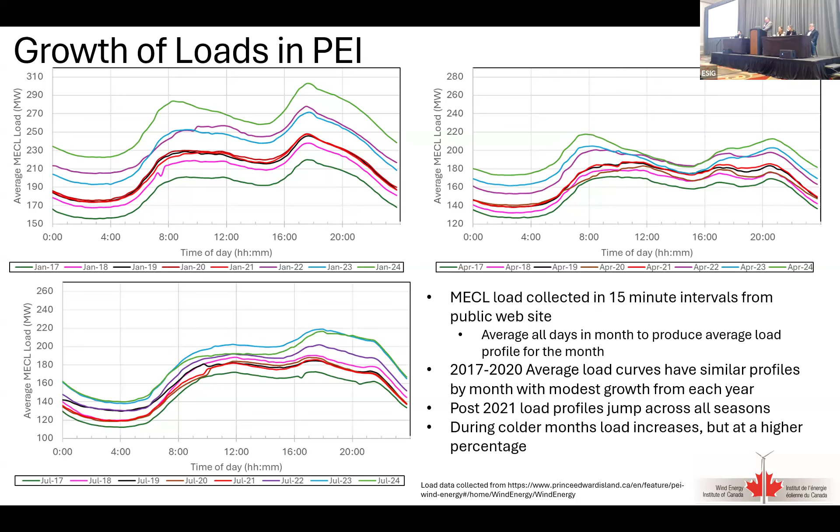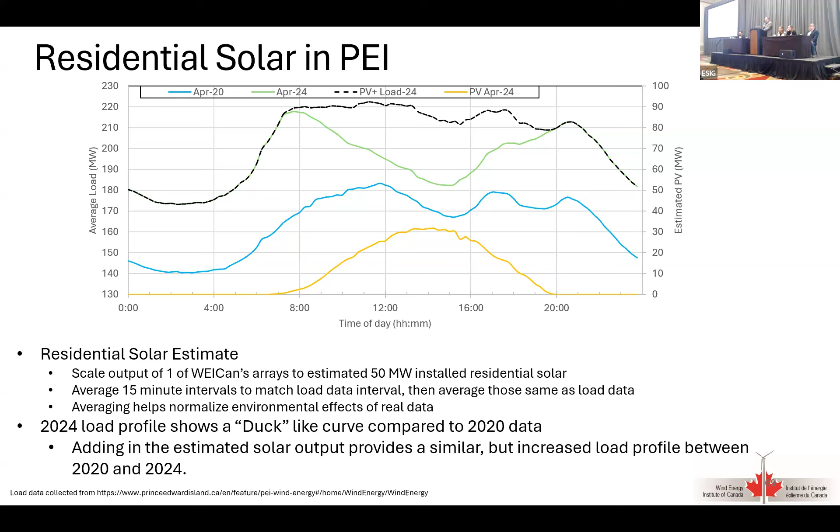To the point where I noted earlier that our local utility was looking for 150 megawatts of combustion turbines to supply capacity, they're now modifying that and interested in probably around 15 plus megawatts of storage, which we were happy to see in our business as a research institute. We think we may even be involved in the ownership and operation in tandem with the utility.

City of Summerside, for anyone who doesn't know anything about this small city, has been a really interesting, innovative utility community. They're small, 15,000 people, but they own and operate their own utility. Through that, they got into the wind business in 2011 and put up 12 megawatts of wind. They've complemented that with their diesel gen plant, and they do bulk power purchasing from the mainland.

Shortly after the wind farm came online, they saw times through the day where the system peaked at about 20 megawatts and was below 10 in the overnight hours. They did a 'Heat for Less' program, offering residents low cost electricity into basically either a water heater or ceramic home furnace, allowing that energy to be dumped to the residents to be used when needed, taking some strain off the grid later.

They also got into some localized production with a 550 kilowatt solar array and a small battery at Eastlink Centre, an ice hockey arena. A lot of the effort they were looking at there was the demand charge that the community facility was seeing.

And Summerside don't mess around. So when they liked what they saw there, they started planning. In 2024, they put up 26 megawatts of solar, a 10 megawatt, 20 megawatt hour battery, taking that mentality from a single user to the entire city. Their expectation this year is that 62% of their electricity is going to come from generated wind and solar within the city limits.

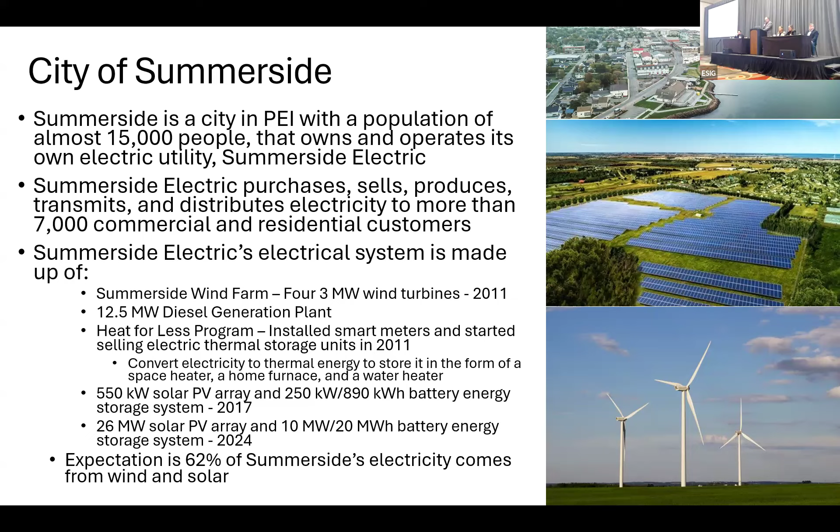Didn't talk much about what we do at WEICan. We've been around since 1981, and for the last 15 years or so we've been heavily involved in grid integration research. We've done some stuff with Canadian utilities in the utility forum, we've done some demonstrations, we had a battery system on our site for a while, and as I noted, we own and operate our own wind farm.

So we're looking at opportunities to work with our province, and ESIG has always been an interesting place for us to hear what's happening in other jurisdictions and at other research institutes. We do think there's a good opportunity for more collaboration from Canada.

Looking ahead, the province has made considerable investments in all of these incentives to electrify more and more of our load. I'd like to say we had the planning to match it, and the utility does do good planning work, though I don't see everything they do. But we've found ourselves in the last couple of years holding our breath, to a point where we're not sure we have the resource to match the need.

So we're interested in working with utility system operators and governments, looking at methods to overcome the challenges we've seen. We do see some parallels with other jurisdictions through this, and we've seen solar installed in the last 5 or 6 years in PEI. We haven't installed a wind turbine since 2014, although there is a farm under construction now.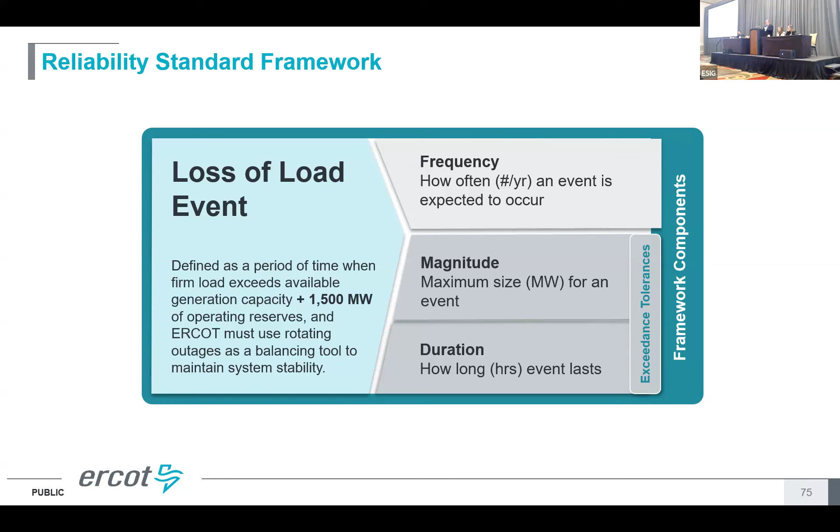So that's really what the magnitude and duration metrics are focused on. And then another new element of this is what's called the exceedance probability and tolerance. So I'll get into that a little bit later. And then let's see, I'll move on here.

So this is more of a deep dive into these 3 criteria. I already talked about frequency, and what the standard is not to exceed more than one event in 10 years. Again, that's common in the industry, and we did a lot of exploratory simulations with our probabilistic model to look at what are the best measures to use. So that's really how we came up with these.

We looked at over 100 different simulation scenarios, looking at different resource mixes and retirements and things like that, just to understand in a really robust way how these would operate within the context of a reliability standard and how you would model this.

So again, what's critical for magnitude and duration is, again, this is a maximum. So that presents some unique challenges because in a modeling context, you're going to get a lot of outliers, and you have to address those in the context of the reliability standard. That's where that exceedance probability concept comes in. So I'll get into that in more detail later.

And then again, magnitude is a maximum amount of electricity lost during any single hour of a potential outage. Duration is pretty obvious - maximum duration of a loss of load event during a grid outage, and it's expected to last less than 12 hours. So that's the reliability part of it for duration. And then magnitude is very interesting because that's really a dynamic type of measure, as it really depends on the capability of the transmission providers to shed load and to rotate it. I'll get into that a little bit more detail later.

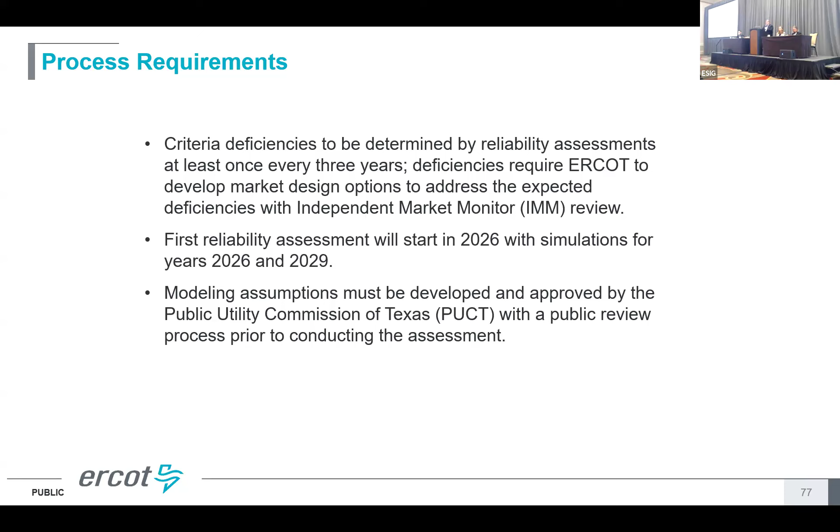So we don't have a capacity market, so you can't tweak that. You have to tweak different incentives to get more generation, both kind of in real time as well as longer term investments. In terms of the timeline, we're going to be starting this first reliability assessment in 2026, and we're going to be simulating the years 2026 and 2029. 2026 gives us a baseline to kind of start off things. Part of this is we have to come up with a modeling assumptions document, pass that along to our commission to get review and approval, and a big role for the public to go through that as well.

Okay, so I want to get into the rationale a bit. I did talk about the probabilistic measures, why they're important. Again, you're really focused on those outlier events, and if you're not capturing that, I think you're missing a big picture.

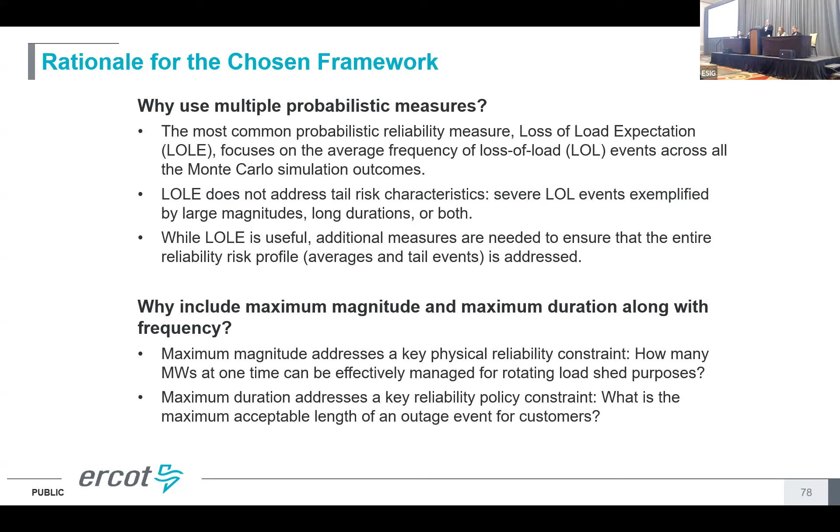So again, we did want to include kind of a frequency measure, common in the industry. We do think it's a useful measure to retain, so that's why we have it.

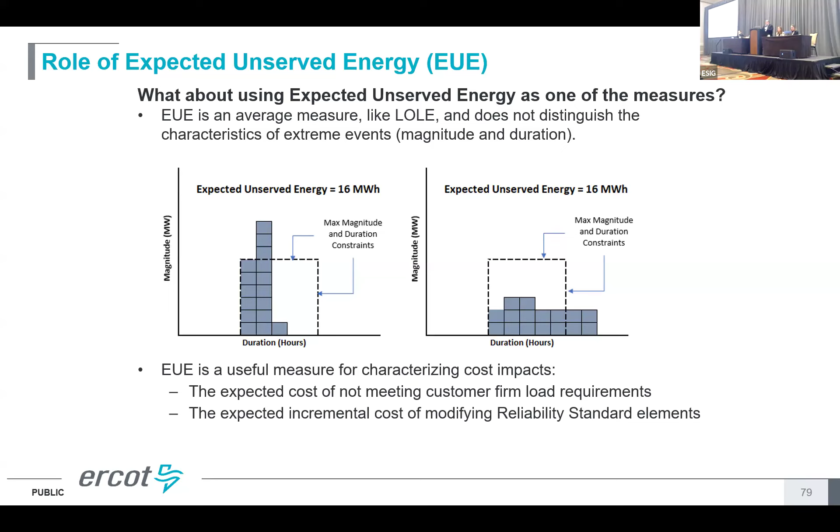Our issue is that expected unserved energy, I think, is useful, but it doesn't get at really these risk attributes of specific outage events. Now, we will be calculating unserved energy, expected unserved energy as a measure, so that will be part of our reliability assessment. Again, it's just not part of that three-set reliability criteria that I've talked about. It's also useful for calculating the incremental cost of reliability standards, so it still is a useful metric.

So I mentioned the importance of exceedance probability, if you're modeling extreme outlier events. Exceedance probability, that's common in weather forecasting and other things. But basically the idea is you're going to have outlier events, and you're not going to be able to afford to remove those. They're very low probability, but it would be extremely expensive to try to eliminate the probability of them happening. So you build in an exceedance probability. For example, here in the chart on the slide, I say like a 1% exceedance probability, so you're allowed to exceed your thresholds by a certain amount. So it sort of gives you a cushion, so to speak. And again, that's important for these metrics that focus on outlier events.

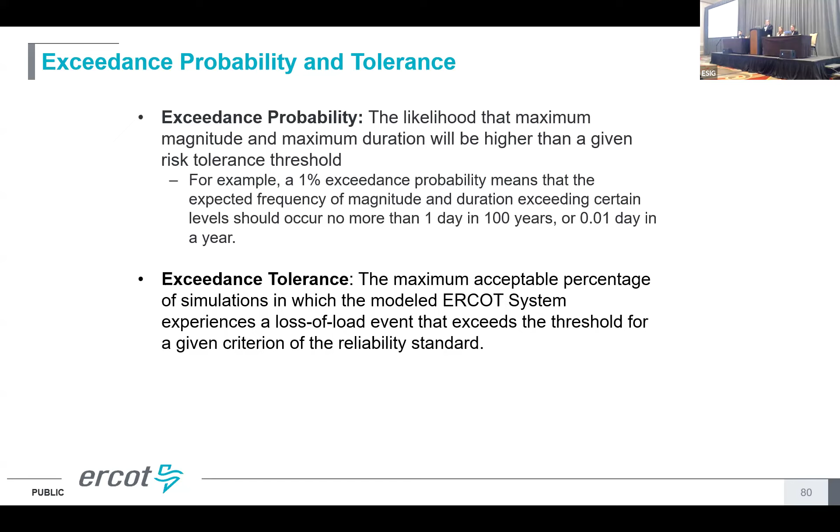And then exceedance tolerance, that's what your kind of threshold levels are for your exceedance probability, and that's really a policy decision. It's not ERCOT. We did do some examination of what different exceedance tolerances would give you in terms of reliability and the cost of the reliability level that you're selecting. So we did a lot of research, a lot of simulation on it, but it was ultimately our commission that had to decide those exceedance tolerance levels.

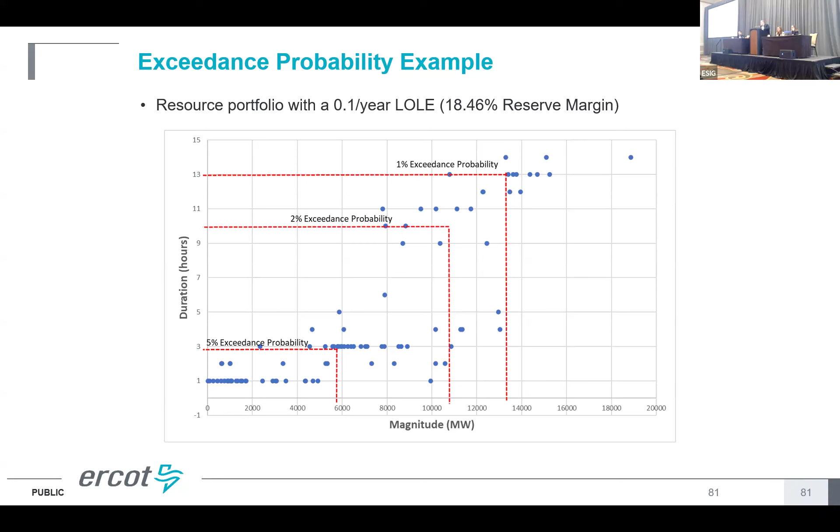Okay, so what I wanted to do is cover modeling challenges. Again, there's really nothing new here, we've been talking about this throughout the workshop. But they say everything's bigger in Texas, so I think a lot of these modeling challenges are pretty big. There's been a lot of discussion about load forecasting and how complicated that is.

Large loads, electrification, electric vehicles, rooftop solar, distributed resources, and energy storage charging. Large loads is obviously particularly important because Texas has been providing incentives to get these large data centers and crypto mining facilities out there. And I remember maybe 4 or 5 years ago, it was a big deal to get a liquefied natural gas facility on the coast, maybe 400 or 500 megawatts at a time. So wow, that's a big deal. And now we're talking about 2, 3, 4 thousand megawatts at one time, and it's pretty scary.

So a big part of that is trying to address that both from a transmission planning perspective, but also how do you include the impact of that in the modeling we do for resource adequacy. So that's a big ongoing challenge.

Extreme weather event modeling, again, that's critical for extreme events, trying to characterize those extreme events. And the problem is we don't have a lot of good historical data. We've got these big winter storm events fairly recently, so we've got very good data on that, but they're infrequent. And you don't have good data going back many decades, which is what you need. So again, we need better data, better historical information, more statistical analysis on how do you create representative winter storm events, and also summer events too, where you've got renewable droughts and things like that, but you need to try to model. So that's a big challenge.